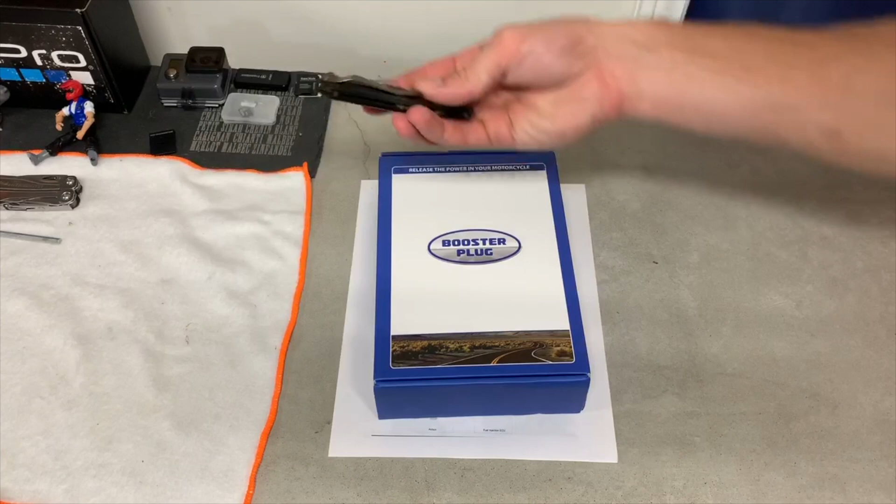So I'll go do the quick install. Actually, we'll do the unboxing and then we'll do the install. Okay, stay tuned. Okay, so we're back here with the Booster Plug. Let's go ahead and do the unboxing. Grab my trusty Gerber here.

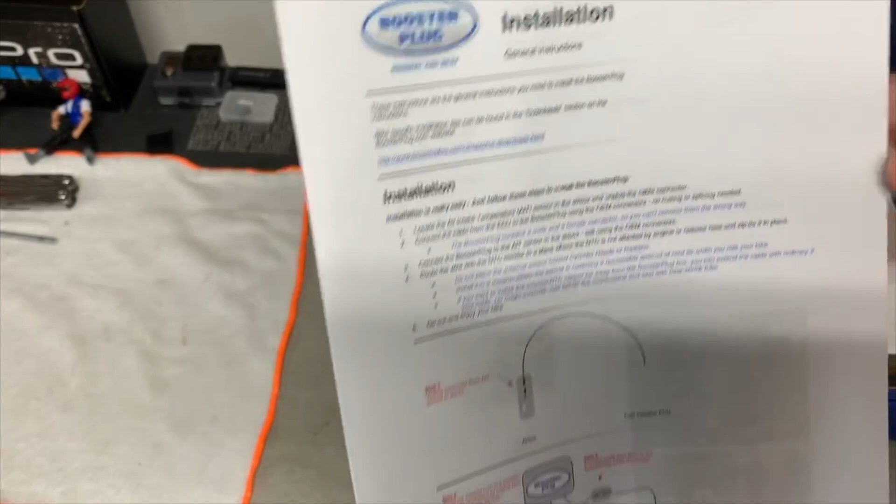So I went ahead and printed the instructions on their website. They have the general instructions, you'll see that there, general instructions. That just kind of basically shows the concept.

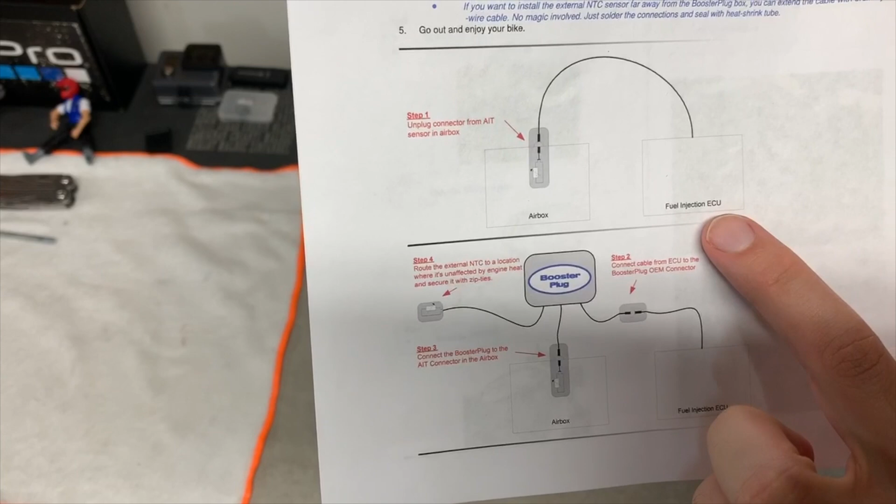You can see that you're basically going to be interrupting that feed from the airbox to the ECU, the fuel injection. So you'll be interrupting that with the Booster Plug and giving that reading. Again, they have a really cool explanation on their website about how that works.

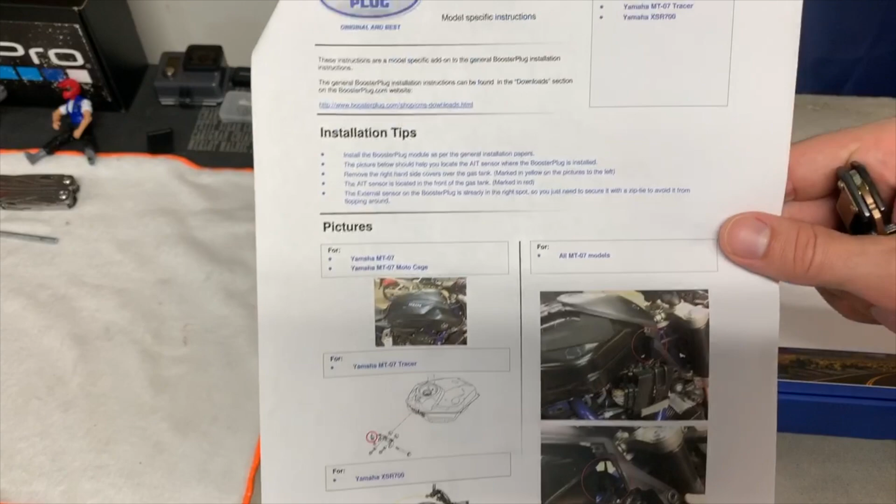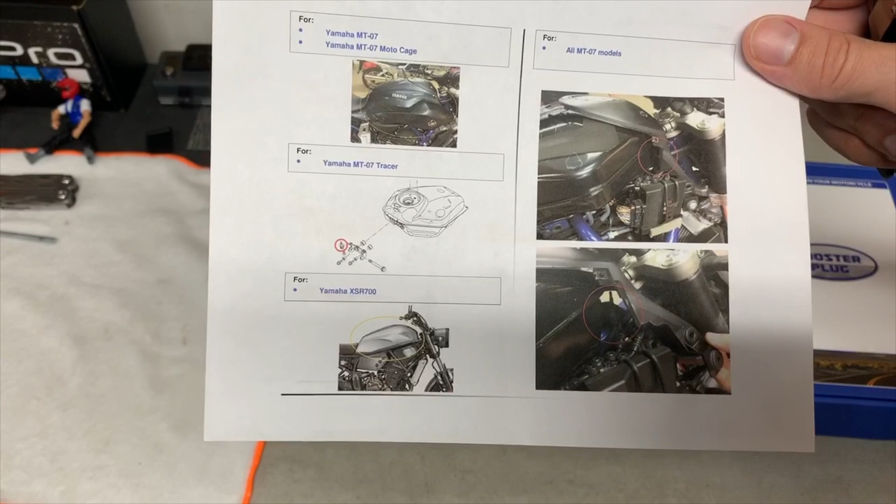And then they also have the bike specific installation tips. So you'll see their model specific installation tips. Of course, this is for the XSR or MT-07, FZ07, or the Tracer 700. If you have any of those bikes, same motor. So basically the same concept, but fairly good instructions for what I'm seeing.

And again, it seems pretty straightforward. It shouldn't be too big of an issue, but I think even if you're not very experienced, the instructions are easy to follow. So again, we'll go ahead and unbox the Booster Plug here.

Okay, alright. So pretty nice packaging, I gotta say. You'll see it comes in a nice little pouch here, the actual control unit itself. And I won't go over...

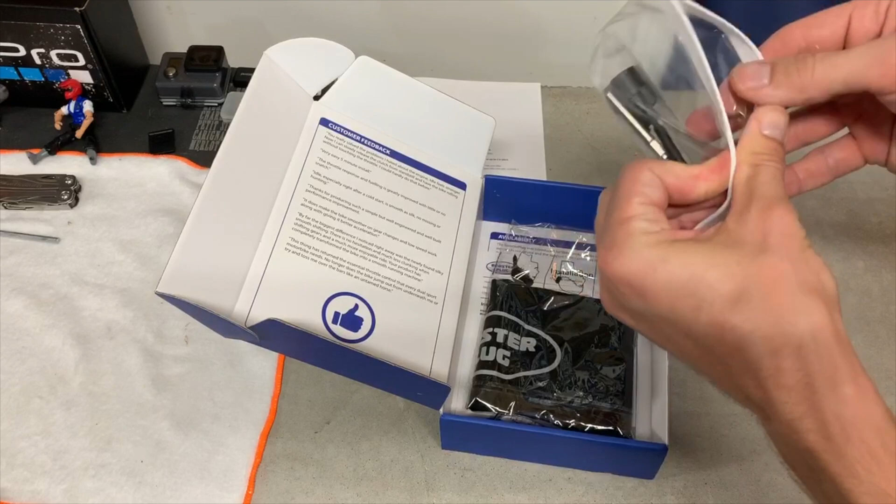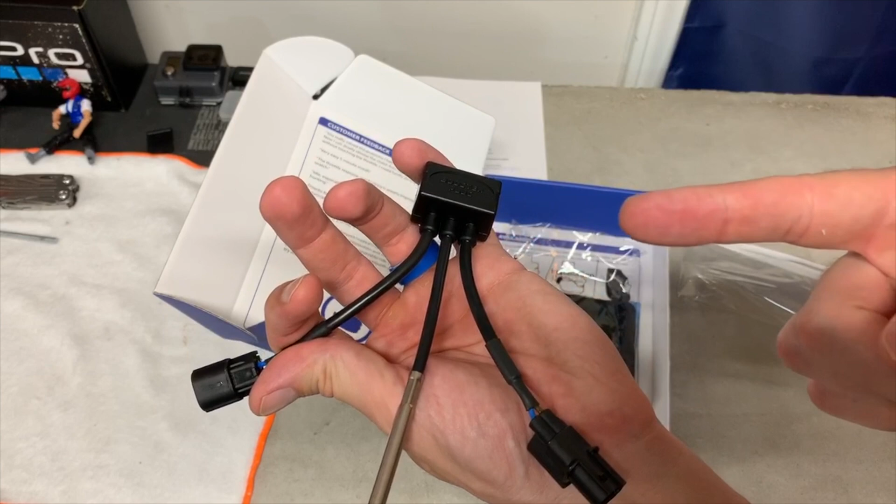But basically, one of these will plug into your ECU, the other will plug into your airbox. So air coming this way, go into your ECU, so it'll plug in here, go out to your ECU. This will basically be the air intake temperature gauge sensor, however you want to call it.

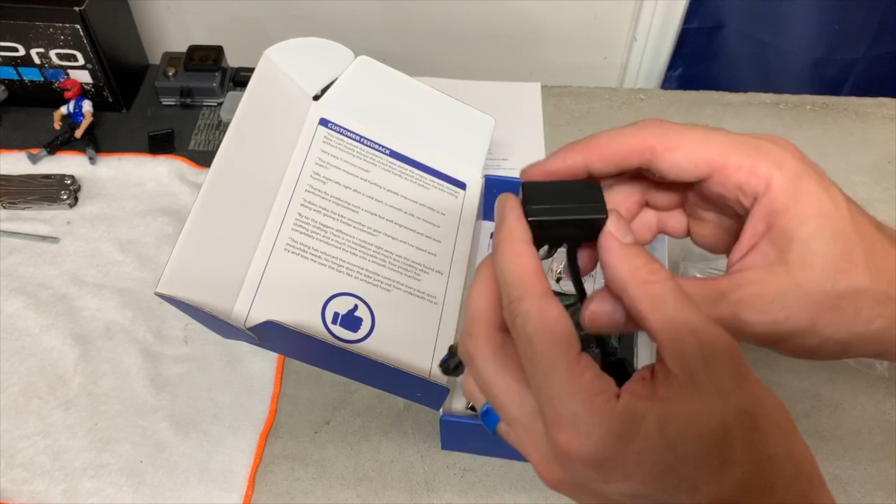And apparently you put this somewhere where the engine heat will not affect it. According to the instructions, when you mount this in the XSR or the MT-07, this sensor is where it should be. All you have to do is zip tie it. So we'll get into that in the installation part.

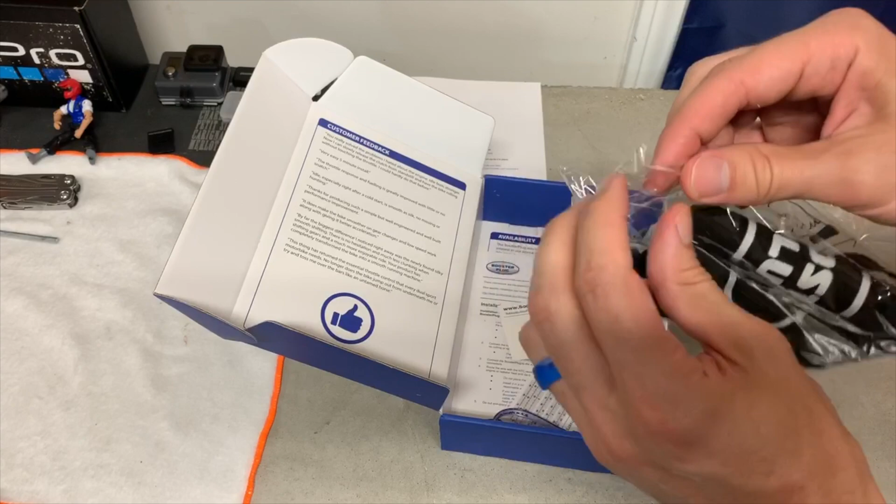So we'll set that aside. It comes with a, okay, that's pretty random, but kind of cool. Basically a cloth here, it looks like some sort of microfiber. And apparently they don't want you to get into it. When in doubt, use a blade.

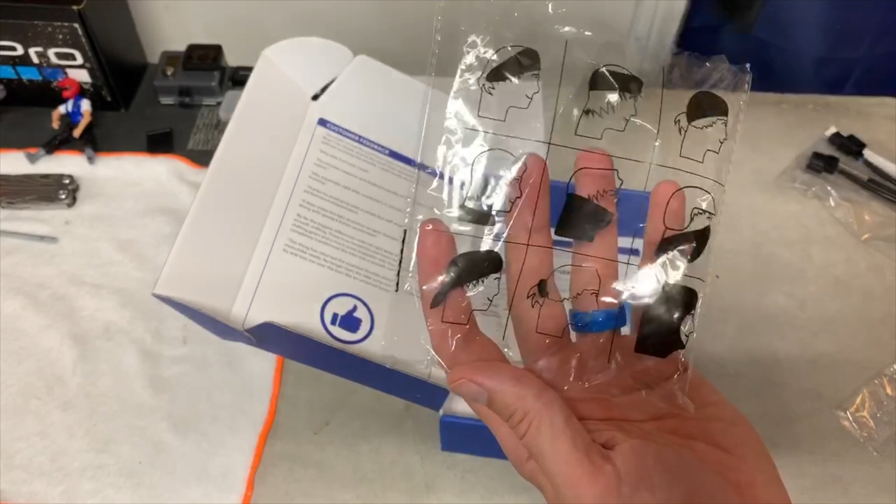So it shows a diagram you can see there, showing different ways to use this. That's pretty funny, but that's kind of nice. It's a really nice material, so you could use this.

A lot of times when I get something like this, I put it in my pack, my backpack, my Drago backpack, and use it to wipe my lens or phone, or just as a general cleaning cloth. So that's probably what I'll use it for. Cool little addition there.

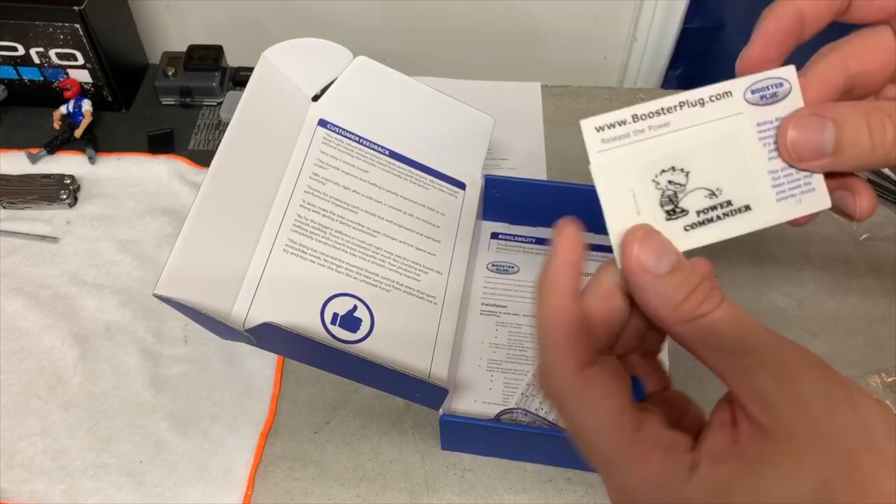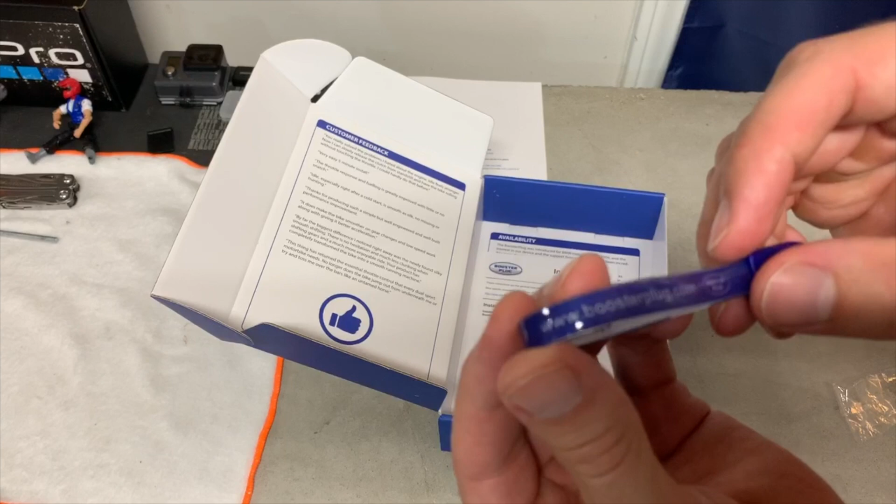Okay, that's pretty funny. So I mentioned the power commander, they have the little decal there, and you can translate that how you wish, but that's pretty funny. And then a little key tag, it has the website name there, and I guess their slogan, release the power.

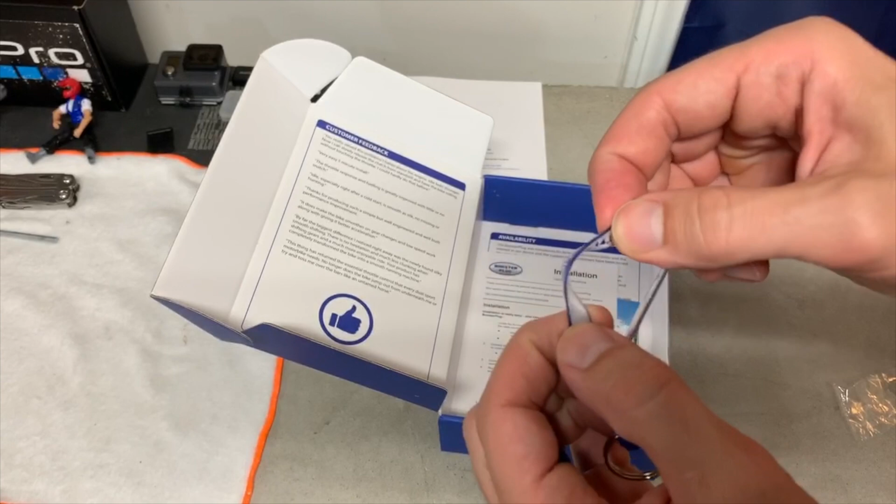It has some km/h to mile per hour charts there, PSI, okay. And then it has a little conversion chart, a motorcycle conversion chart, so a little quick reference guide. That's kind of cool, you could probably put that on your fridge in your garage, or up on your pegboard or wherever.

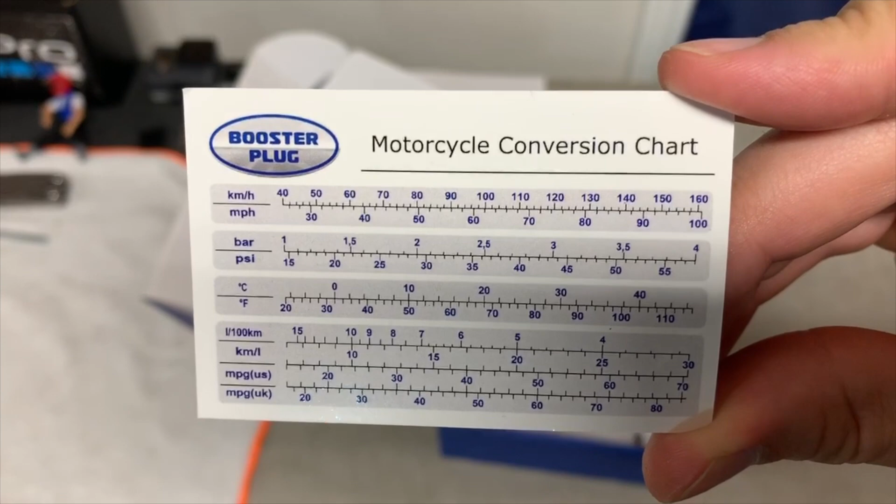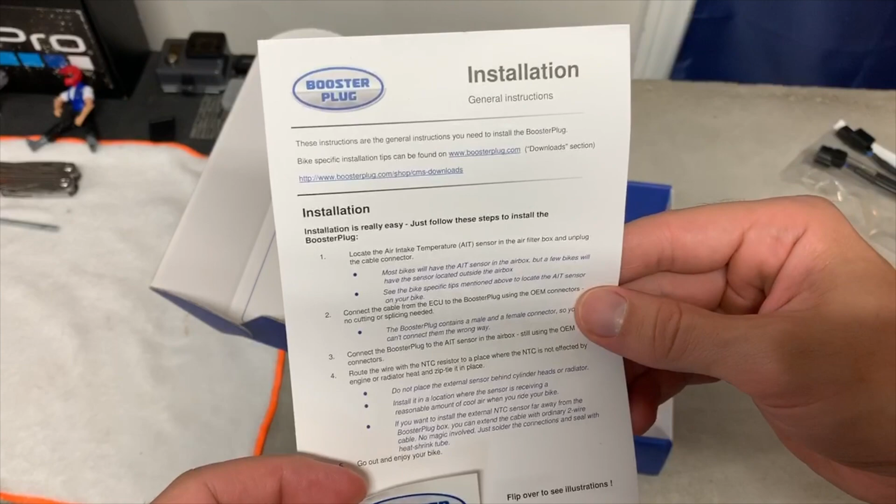And then it has the installation guide here as well for the general. Sorry about that, hitting the table. And of course the little sticker, so that'll probably go on my fridge in my garage where all my other stickers go. Installation guide, plan, ride, share - looks like an app that they use, a ride app. And that should be it, that's the bottom of the box.

Okay, cool. So I will put this back in here, and I'll go ahead and put the towel back in there too, and I'll keep these out. These will go on my fridge. Instructions, okay cool, so you see that there. There's the actual control unit, and we will go ahead and get into the installation portion.

Okay, let's go ahead and get started. So according to the instructions, you will take off these panels here. They say to go ahead and just take off the right side panel because you'll be accessing the AIT from here. Supposedly it's in front of the gas tank.

So you will use a 3mm hex for the side panels, and there are 8 of them. I'm gonna go ahead and remove the seat just in case we need to access those. Yeah, so there's 8 of these 3mm hex keys, so I'll put the seat down there.

Okay, so I'll go ahead and start undoing these bolts here. What I always do with these loose bolts, because it's a lot easier, is take a little bit of time in preparation to have a system where you're keeping these screws in one central location. That way you don't lose anything. So it pays off to take just a couple of minutes on the front end to prep and make sure you keep these all together. That way you won't lose them, or have an extra bolt, screw, or washer laying around.

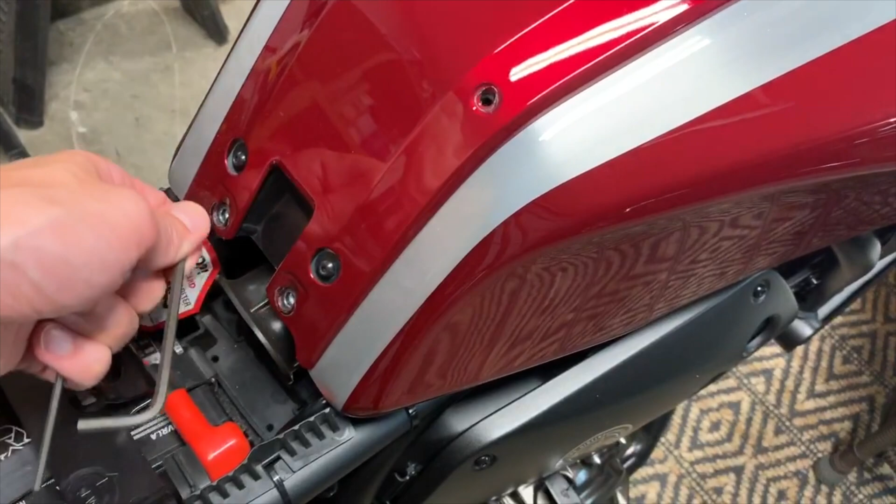And don't forget about these down here on the tank strap underneath your seat, those 2 bolts here, 1, 2. Those are 4 mil, and then also the ones at the very front there, those are also 4 millimeter. And as you know, if you have one of these bikes, this is only a cover, so you can access the tank fairly easily. You can change these out, you can kind of get access into these vital areas without taking the actual gas tank off.

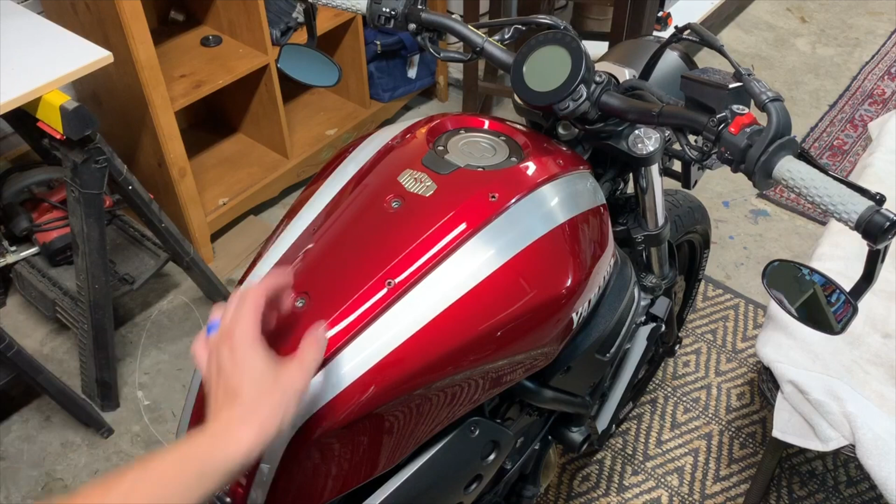Okay, so we have all the appropriate screws taken out, we have all the center strap screws taken out, so that should help - we should just be able to lift this off. And then this side tank panel, I believe there's 1 or 2 more bolts underneath that strap. But as you can see, I have my bolts laid out in the exact pattern that I took them off. Again, that might be an OCD thing, but that lets me know exactly where those are gonna go when I go to put those screws back on.

So okay, you'll see here we still have a couple more. There's, I believe, 2 more 3 millimeter hex screws there, so we will go ahead and take those out. And then there's a pin at the front here, a little plastic push pin at the front.

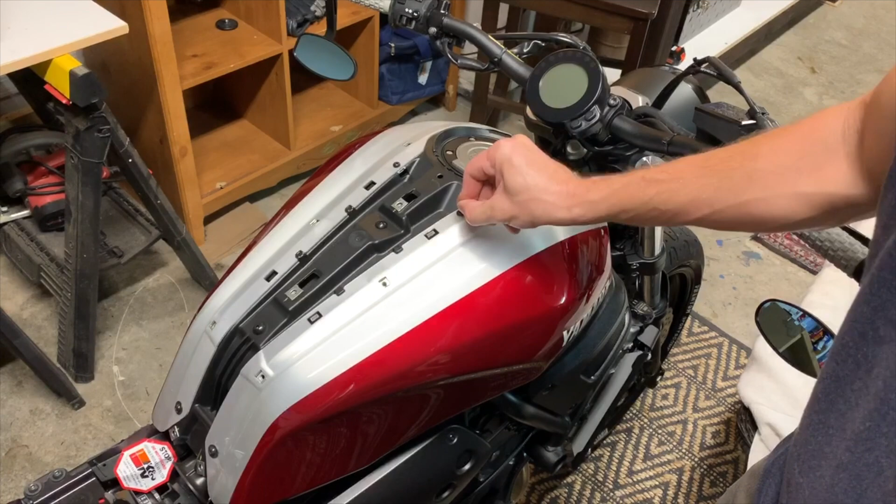Make sure you save this one, it comes with a washer, so make sure you're noting which one that is. It might not be able to pick that up. There you go. I'll go ahead and just pop this little pin.

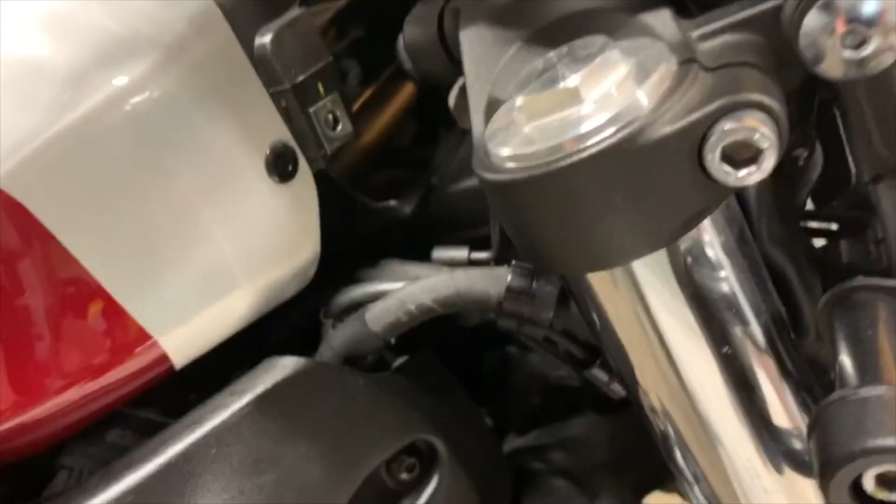All you do is take, I'm using my 3 millimeter hex key here. All you're gonna do is push that in, pop, and then that will pull right out. Again, make sure you save this, because when you put it back in, all you're gonna do is just press it right back in. So those will catch, and this little part here will recess back in, and it'll lock that tight now.

I'll put that back over here, so that will be on the front end. So this should be able to just come out. There's a couple little clips holding it, but that should come free like that.

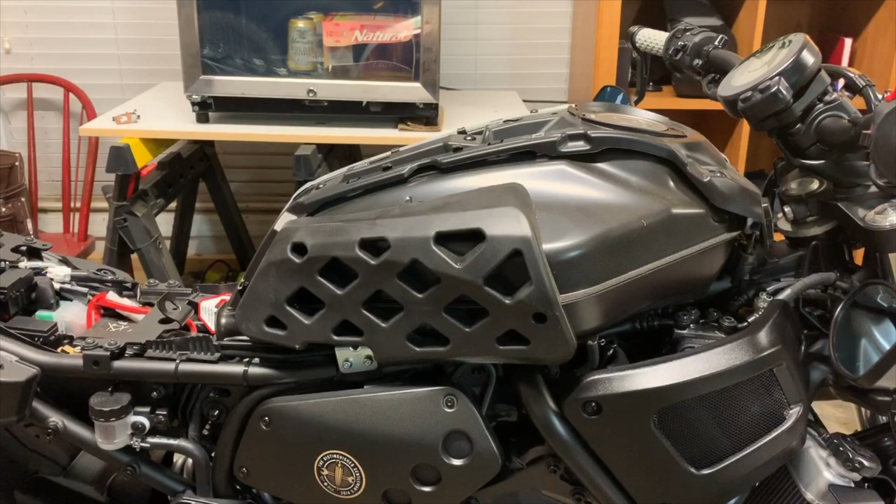All right, so I have my tank panels set over here with the screws underneath there. Okay, so we've got our tank panels off. Apparently the air sensor, and I can see it right now. Maybe you could have spotted it before me. Okay, so let's refer to the instructions just to be safe.

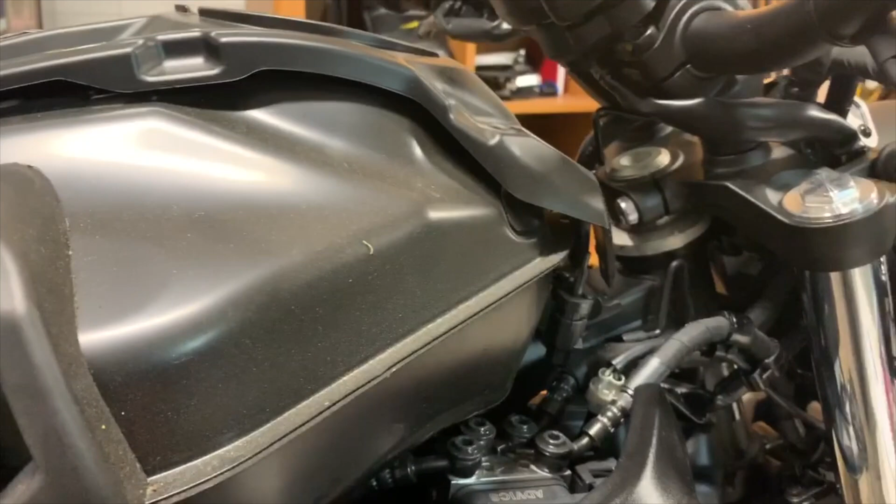The handlebars are kind of in the way. Should be it right here. Okay, so yeah, that little sensor that I pointed out here, right here, that's what we will be disconnecting. So we'll be disconnecting the harness from that.

All right, so let me see if I can work my tripod in here. I wish you guys could see my setup here. It's a little bit comical.

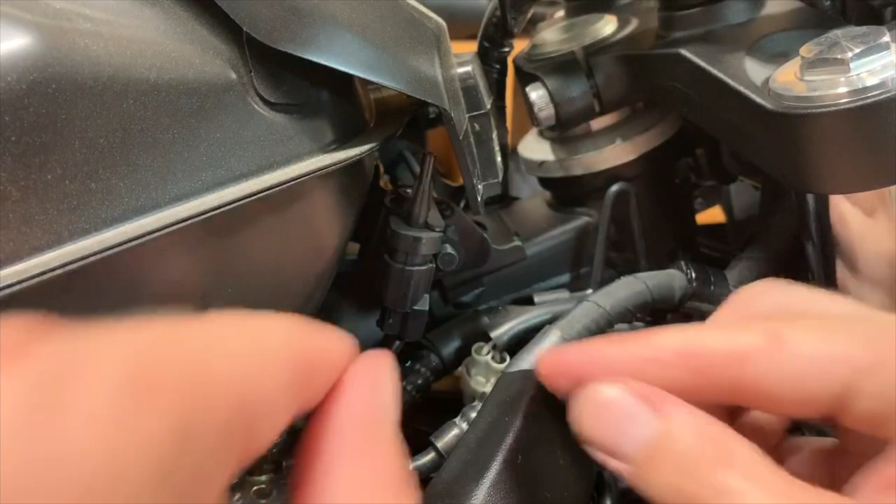All right, so it says to unplug, find the AIT sensor, which we did, and unplug the harness, which we are going to do right now. So it's basically just a little push connector. Okay, so you'll see that connector there.

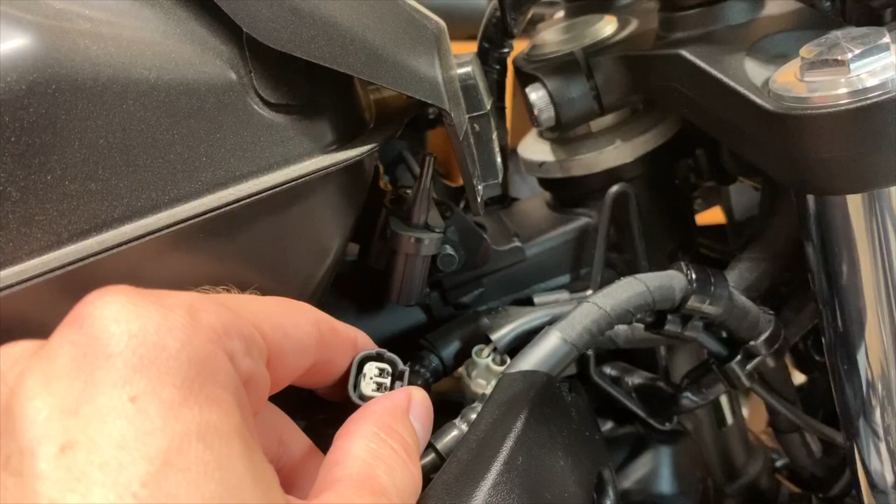Connect the cable from the ECU to the booster plug using the factory connectors. No cutting or splicing needed. And unplug the cable connector. Okay, the female end here will go here.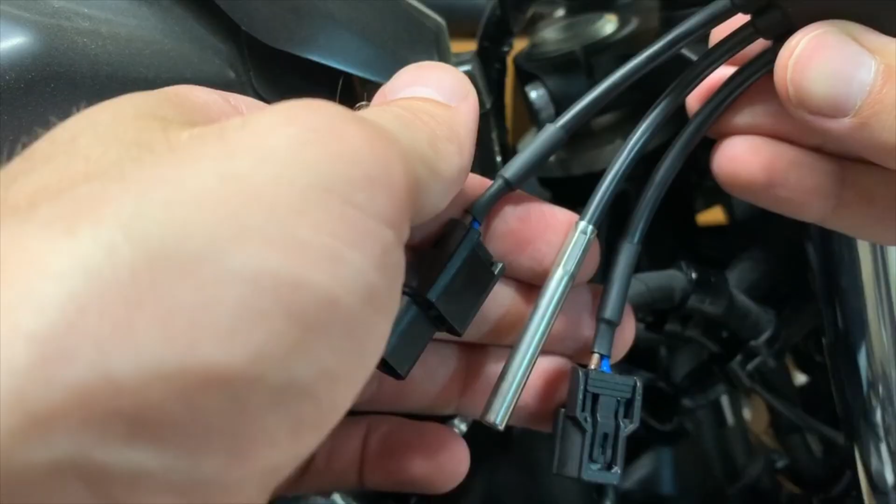And then this sensor, I guess it's gonna basically bypass this other sensor here, because it's basically tricking the ECU into thinking that the air is colder. We'll go ahead and plug this. Okay, so this is the module, the booster plug. I'll go ahead and plug this into the factory ECU, factory connector.

All right, a click is always a good noise, so we know we're good and connected there. So we will have to do a little bit of tucking here, but that's okay. There's actually plenty of room in here.

So it looks like one of the main notes here is do not place the external sensor behind cylinder heads or radiator. So you'll see we have plenty of room here. We're not behind cylinder heads or the radiator. This will actually be in a nice area where clean air will be coming in. So that will be perfect.

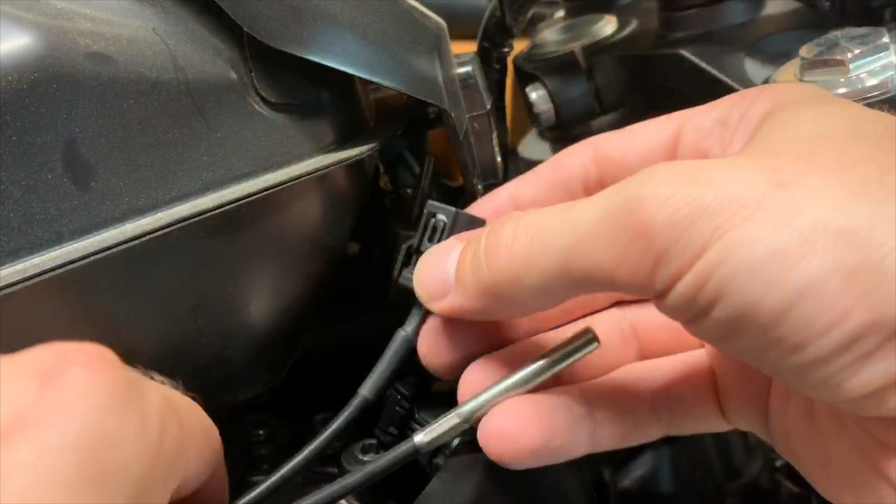Okay, so I'm leaving the module sort of hanging down here. So we will then plug this into our AIT, the factory AIT. I believe I have it wrong actually, turn it around.

Okay, a nice little solid engagement click there, so you see it's nice and solid. Okay, they're saying this should be, when you plug these in, the way that it's laid out, it should be where it needs to be. So I actually agree, it's right here. It's gonna get some nice cool air.

What I may do is zip tie it to the other cable here, that way it's not just flopping around here, because this is actually tucked in there quite nice. Okay, so that's what I'll do, I'm gonna zip tie that.

If you are a DIY person and you don't have zip ties handy, go and buy a bulk pack right now, you will use a zip tie. I carry an assortment of them in my riding pack.

Okay, so I don't think this needs to be, once I secure the AIT here, it should keep this portion fairly secure, so I don't think I'm gonna mess with that too much. So that's gonna tuck there. I'm basically just gonna zip tie all of these together. And these are just the factory, or sorry, the booster plug connectors.

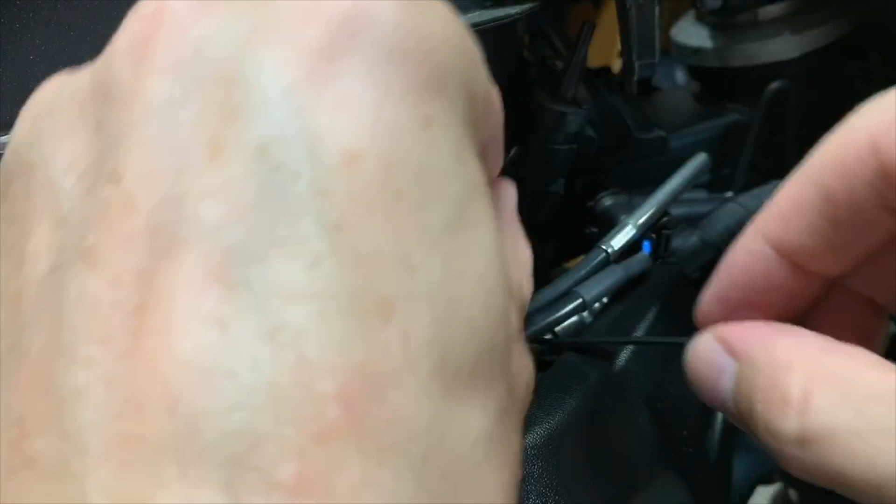My hand's getting in the way there. It's kind of a tight spot. Okay, so I'm just gonna zip tie these together. And when you zip tie stuff like this, you don't have to just bear down on it. I mean, there's no reason to that. Just get it a nice snug tie.

Okay, so you'll see it's free there to move around, but it's nice and tight. I think that's going to work out pretty nice. It depends. I might, after the first ride, if I feel it or hear it kind of jostling around in there, then I might change it. But let me go ahead and trim this off. And another piece of equipment every person should have, a Leatherman.

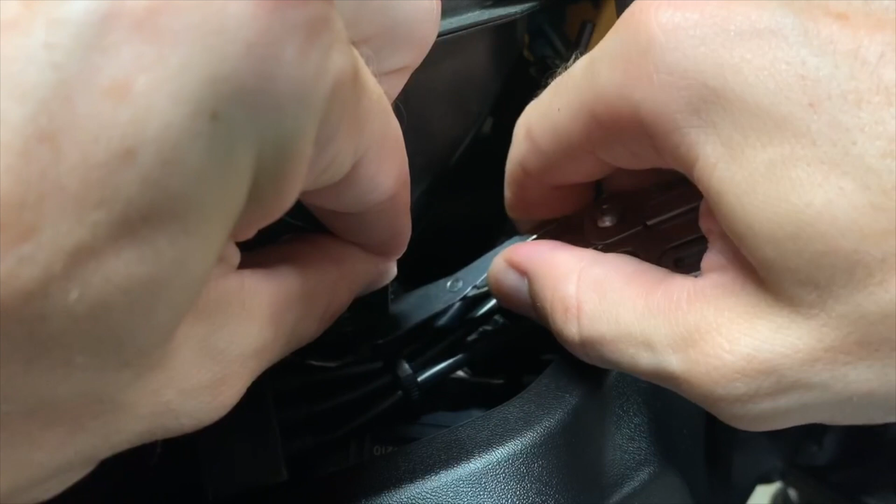It's a nice thick piece of zip tie. Okay, so we trim that. That's pretty good there. I don't mind that that's doing that. That's okay, there's not going to be any heat source coming into there. So yeah, I like that. That should work out quite nice.

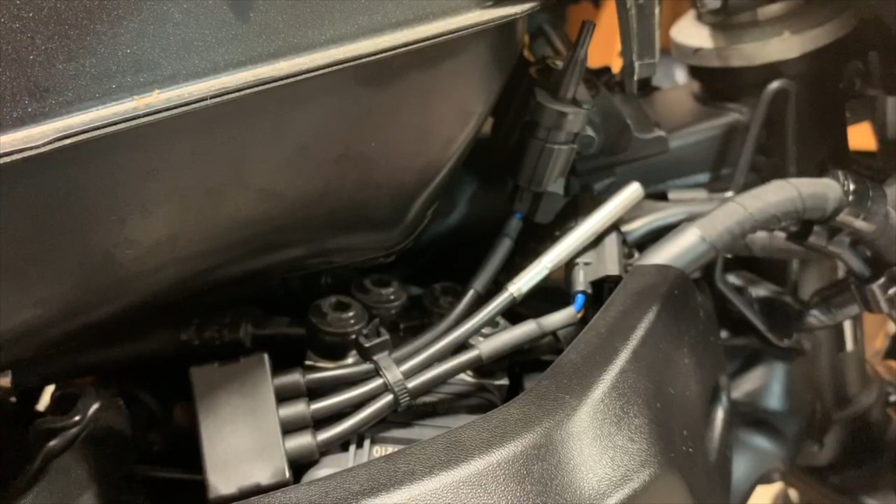Okay, so let's go ahead and put the tank covers back on. And I'm not going to show you that, guys. You basically just do what you did in the reverse order, and then we'll do a quick ride, and I'll let you know what I think.

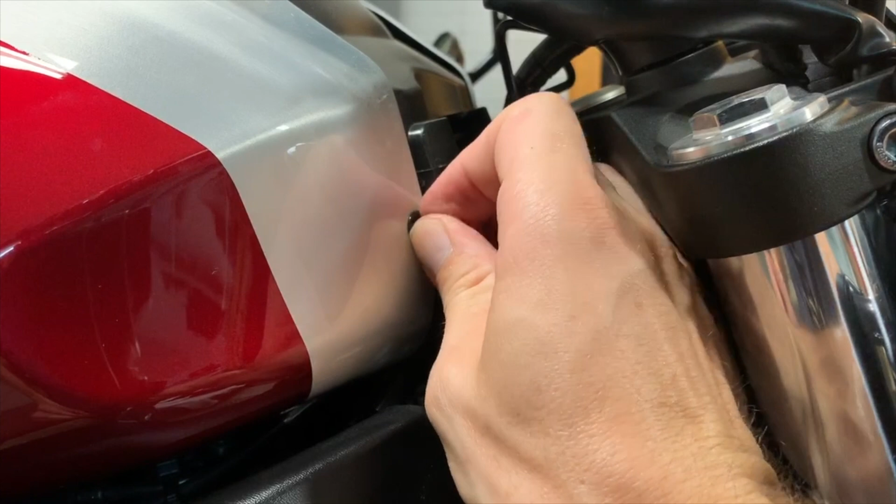Stay tuned. Okay, one quick thing I feel like I had to clarify when I took out the push pin here. So you'll see when you push in, it goes. That pin just goes. The center of it just pushes in and releases. So what you will do when you put it back on is you'll actually push the pin back out, so that middle portion is sticking out like that. Hope you can see that. Yep, there we go. So that'll be sticking out, and then you will just pop it back into the socket and then push it, and you should feel a nice little solid click like that. So yeah, just wanted to clarify that.

Okay, so I've got everything buttoned up, tank covers back on, and you can kind of see, if you look really hard at a certain angle, that sensor there in plain view, and that's going to get nice clean air coming in through there. So that's exactly where you want it. That took probably 10 minutes to do. Very simple, very cool concept, not a ton of money, so I'm really interested to see what that does.

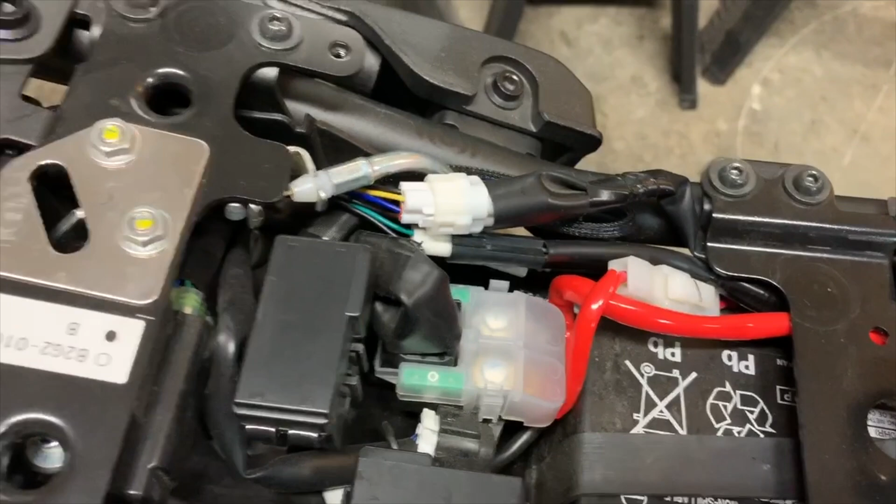So we'll go ahead and do the quick ride video. One quick thing I wanted to note is the New Rage Cycles kit that I have here. So I have the integrated kit with a tucked plate. A lot of you have asked how the rigidity of it is, how the build quality is, and what it looks like under the seat. Well, there you go, super clean, plugs into your factory harnesses. I'm really happy with this kit. It's been awesome, it works great, it looks good.

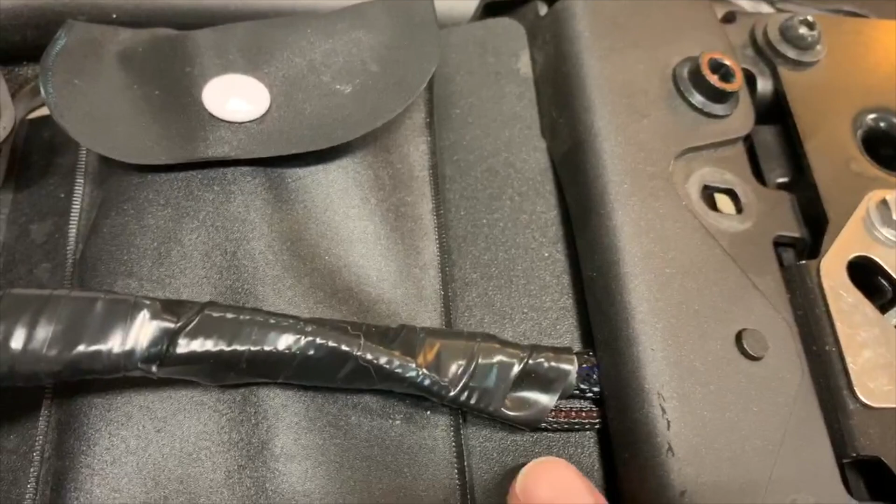That's a high quality polymer there, you'll see that braided, and they have nice wire covers there. So I did this, just to kind of clean that up, I went ahead and wrapped that with electrical tape. But you'll see it just comes with those wires there, so really clean kit. The one thing I would say, the design in LEDs is so advanced, I don't see why they couldn't have somehow made this a little cleaner.

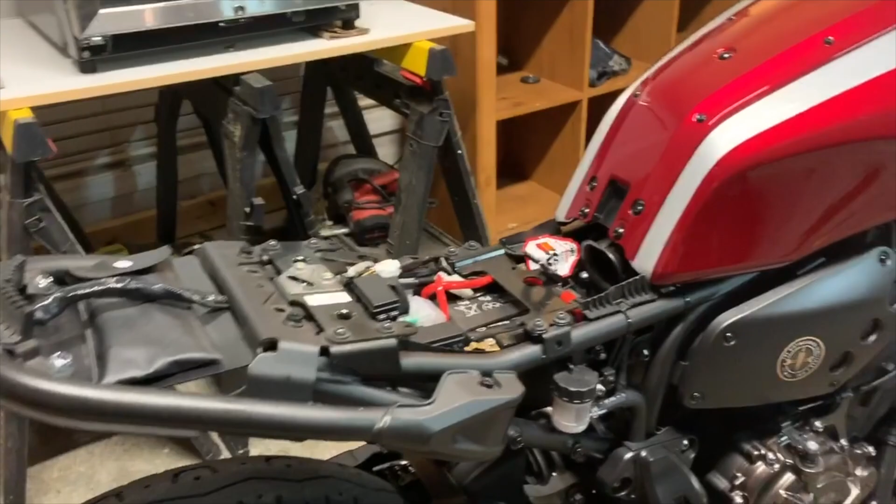It just kind of cuts off. So I don't know why they couldn't have made that, some sort of molding where that kind of just blends into the frame. That's the only gripe I have. Other than that, I love this kit. So, okay, enough about that. Tank is back on, handprints are wiped off. So I'll go ahead and do that ride video.